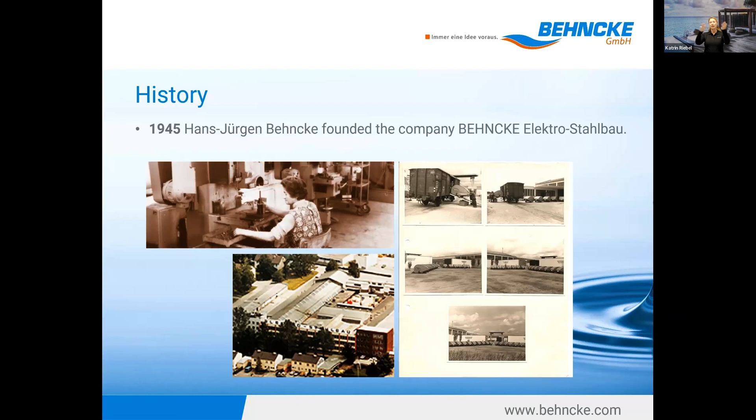So yeah, our history. BEHNCKE has a very long history, since 1945. Imagine, at that time nobody talked about swimming pools. So BEHNCKE at the time worked with steel. Maybe you remember this car parking construction where you went into the car, it went up and the next car came in. For example, this is something they were producing at that time.

But in 1970, Michael started with swimming pool equipment. He already did filters, heat exchangers, and swimming pool equipment. So Michael was the first one. It's over 50 years ago. We have a history of swimming pool equipment. Unfortunately, life sometimes goes different ways, as most of us know. He was very ill. So his daughter had to take over the company when she was very young. Imagine you have a company when you're 23 years old, and deal with it.

Now I would like to show you a little video so you already have an idea of what we are actually doing here in Germany. Hello, I'm Angela Herman, responsible for international sales for BEHNCKE. Just coming from Barcelona, I want to show you what makes BEHNCKE so special for you.

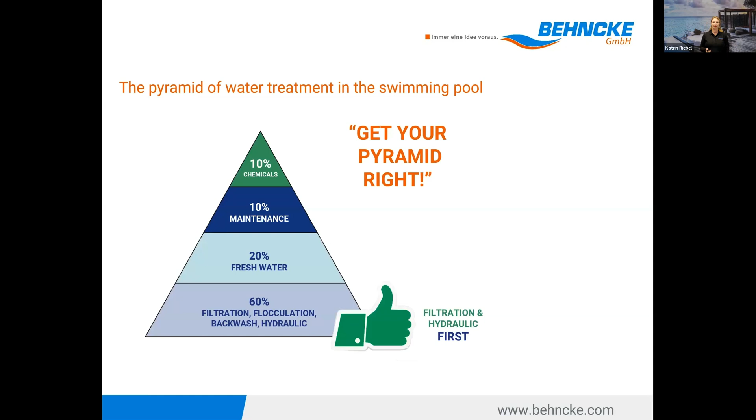Of course, not only the theory, but we also follow regulations - the European regulations for security and water treatment. And on top of that, we follow the German norms from the German Swimming Pool Association.

And here I'm going right into our products. We start with filtration. My colleague has made a super nice video where he explains in detail the complex work of making a filter.

Hello guys, hello everyone. My name is Christian Ebert and I'm responsible for the production sites of the BEHNCKE company. Today I have the honor of being your guide. In a few moments I will show you an insight into the production of the BEHNCKE company. In the course of our tour you will see and perhaps understand what a great effort it takes to produce a pressure vessel of our high quality. But enough of me.

Come on, let's start. Now we're in the mold making area. The life cycle of every pressure vessel begins in this small area. Up to 4 employees are responsible for the maintenance of the molds, but they are also responsible for building new molds with improved properties, to adjust molds according to customer requirements.

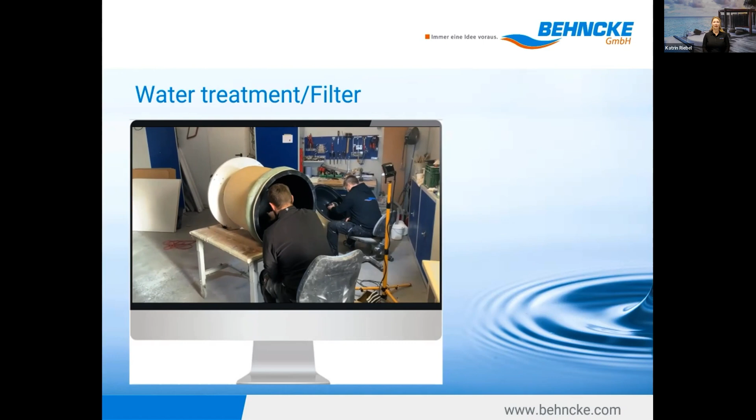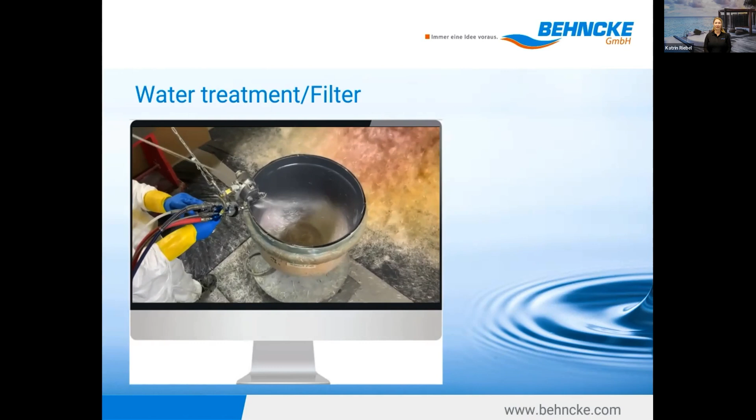The individual filter components are manufactured using various methods, such as fiberglass spraying. However, wrapping or hand lamination is also used, depending on the container type and requirements. Fiber spraying, as shown here, is carried out exclusively by trained employees with many years of experience.

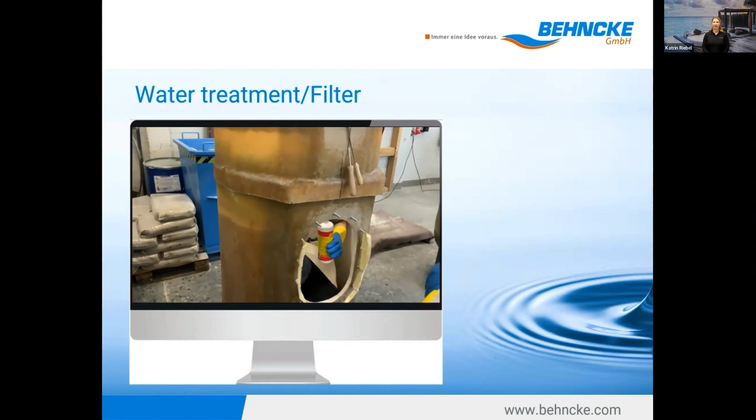Here we see the filters that are made for use in public pools or process water treatment. These exceptional filters are manufactured up to 3 meters in diameter, 4 meters in height, and 10 bar pressure resistance. Many extensions are integrated on customers' request. A split delivery and assembly is also possible and realized by our own employees.

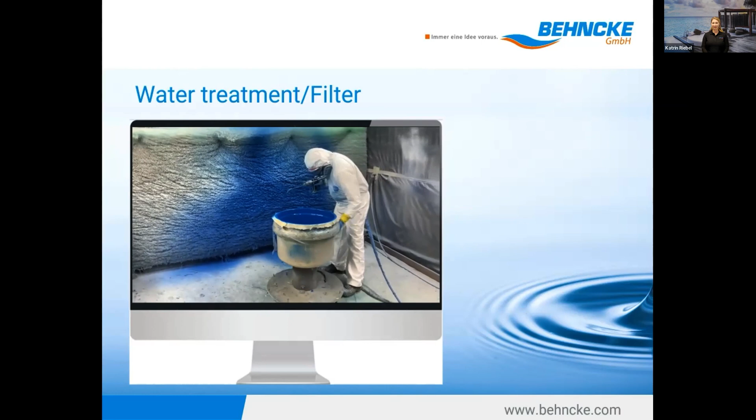Now we are at the start of the manufacturing process of the private filters. First, the color gel coat is sprayed into the molds according to the customer's requirements. Then they come to tempering in a drying room. After drying, they have to be trimmed and pushed to the next process step, the fiber spraying. With the help of modern production methods, there is a possibility to manufacture 100 parts per day.

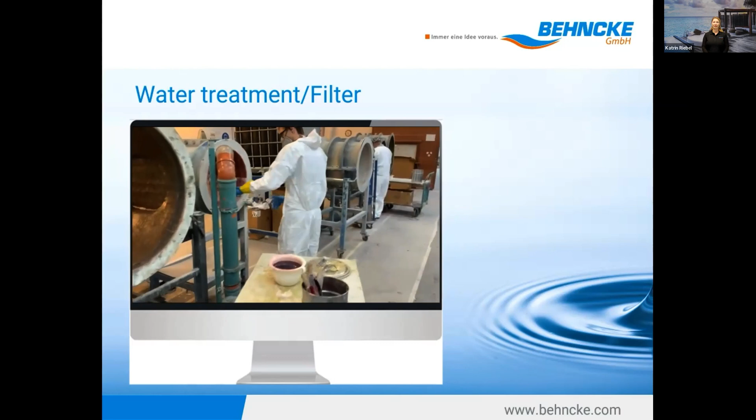Even in private pools, more and more emphasis is being placed on performance. So some filters are equipped with a third component, we call it the jacket. This significantly improves the filter bed and smooths the filtration.

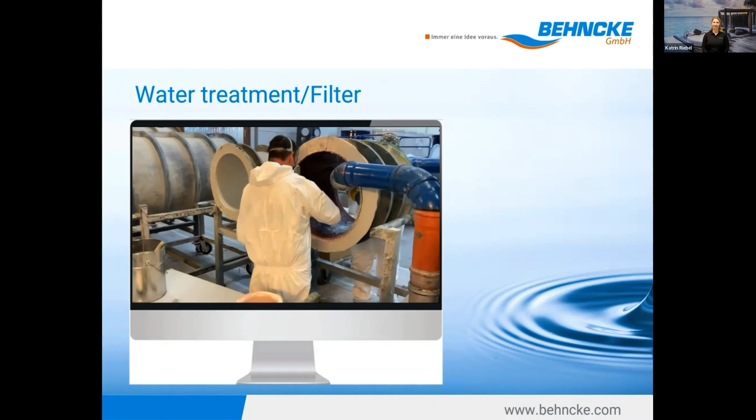Unfortunately, producing the cylinders is also the most difficult of all manual activities. In order to achieve our high quality goals, additional reinforcements are modeled at the critical points. This is one of the reasons for the longevity of our filters.

In order to manufacture as efficiently as possible, the already prefabricated raw parts are taken from the assembly warehouse and pushed to the next step.

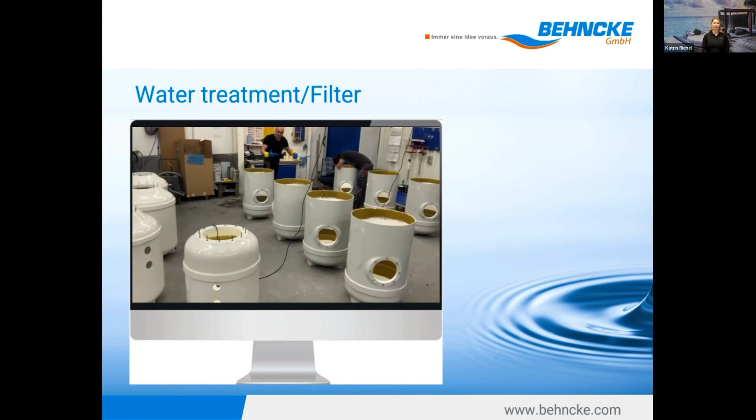Now, the individual components are connected to each other with a strong laminate. That's what we call the wedding. Here, in just a few steps, a single component becomes a container.

After the laminate has been vented, a protective layer is applied, which represents an additional barrier against chemicals or aggressive substances. Next step, the assembly department.

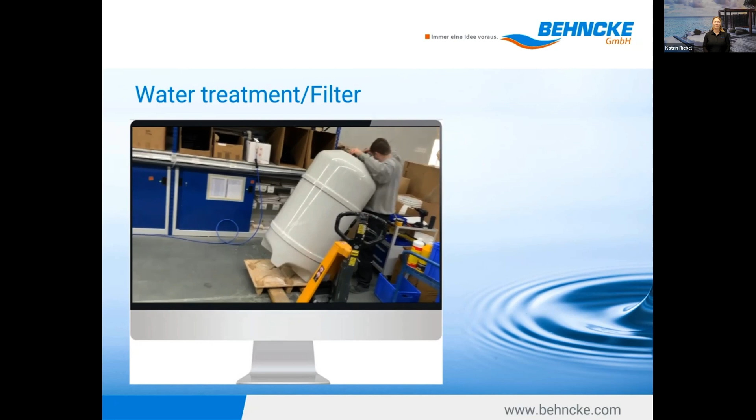Now, container became filters. Depending on the type of filter, filter fingers or filter nozzles, connections and sight glasses are fitted. The rest of the pipeline is also installed here.

Once the filter has been assembled, a valve and a pump are assembled into a filter system, depending on the customer's order.

Before the filters are dispatched, around 20 to 30% of all filters are checked with a pressure test, as you can see here.

As soon as the filter or the filter system is fully assembled and packed by our guys, the shipping department sends it to almost every country in the world.

Before we end, there's a little look at the site here. A production site which in its long history has increasingly developed into the market leader for quality products. A company that values health, sustainability and effectiveness. An organization for which a common, familiar and mutually respectful togetherness is important. We are all that, and we are all BEHNCKE. High quality products made in Germany.

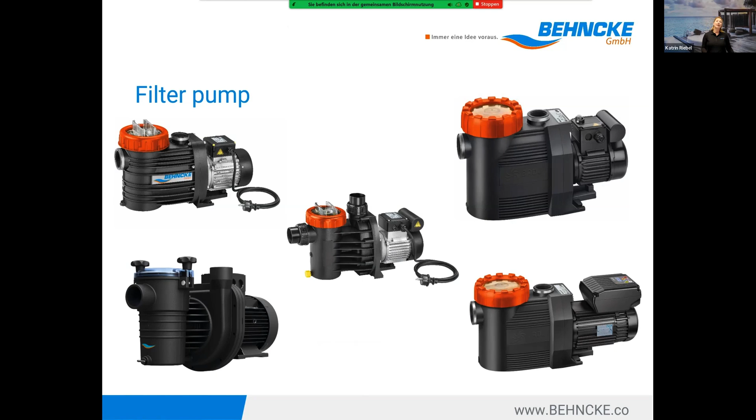Nevertheless, to have a good filter, you need the right filtration pump. And for us, it is very important to have a speed regulated pump. I will show you why. Because we do have different flows, and that's why we want to have different kinds of speed. And at the end, it saves also money. That's very important for the end customer.

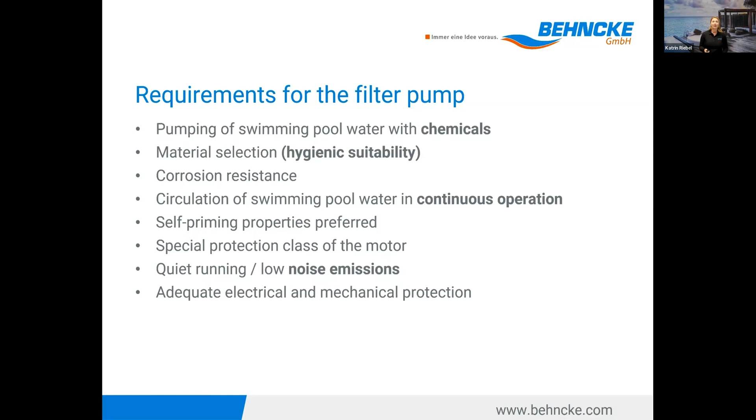But nevertheless, this pump has to be chemical resistant, it needs to be hygienic, it has to work in a continuous process. And nowadays, it should not be very loud, it should be very quiet. Who wants a loud pump? So all these things are very important.

If you have such a speed regulated pump and you already have such a good system, you also want to have to control it. And therefore you want to have a process control.

The other day I was in Portugal and I had no control, and it's not good if you don't have no control. I was in the car and I rented a small Fiat 500 without GPS, and there was a cyber attack on Vodafone that day. I didn't even have internet. So you're lost in Lisboa and you know the name of the customer, that's it. So this is what you have when you have no control.

And it's kind of the same in the pool when you don't know what is the flow. Every time I run out of the camera, I'm getting something. There is something which is inexpensive and it shows you exactly, it's super accurate what is your flow. The good thing about this one, I'm not saying it's the only flow meter, you can take any version, whatever you have, but this is a very good one because you can install it wherever. You don't need a long stretch of pipe before. You can place it before, after, I've seen many videos on YouTube how they install it even later. So this is very practical.

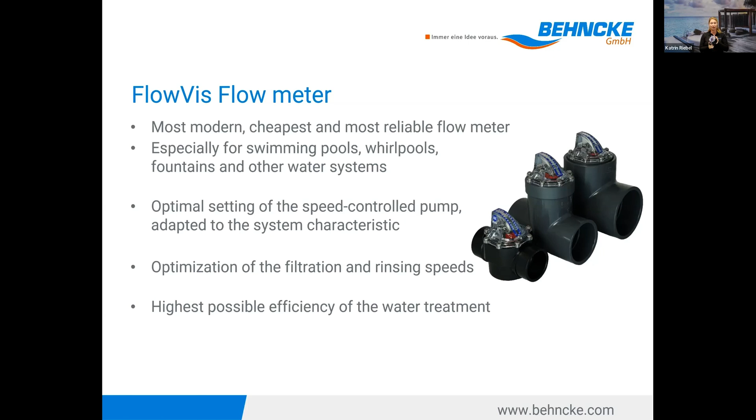It is existing in different sizes. You have even a non-return valve with the first two ones, which you can see. And there's also a digital version.

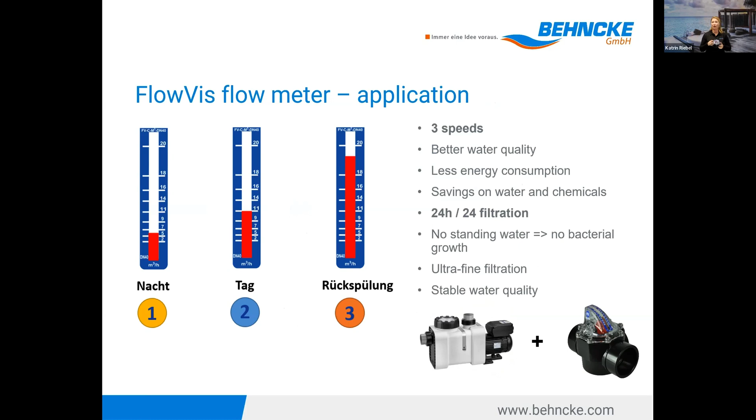All this together, a speed regulated pump and a flow meter, gives you the possibilities to really regulate and control what is going on in your pool. You can do slower speed at night, faster daytime, and you really want a good backwash. Yeah, this is the first part done.

Now I'm coming to our filters, actually. There are many different filter materials. Let's say the cartridge filter, let's start with this one. The other day, somebody asked Marcus, who was also a big boss of the company, why do you think that your filters are better than a cartridge filter? Cartridge is not bad, it is very good, there's a very good fine filtration.

But I can tell you from my experience, I have a very tiny jacuzzi on my terrace, and every time I have to clean that cartridge thing, every layer, you spray, and at the end you think it's not clean, it's still not clean. So it is difficult to clean, and backwash is mostly not possible. The same with membrane, it's a very good fine filtration, but it's also not easy to clean.

Bead filters are more like for fish breeding, you create a biofilm, which we don't want in this case. We used to produce them here with BEHNCKE as well, but it's not what we do at the moment. We are producing AFM filters or media filters, because you can put different media in this filter, but we are working with activated glass material because we have that very long history, as you have seen, more than 50 years. This is the one we are most happy with, simply saying.

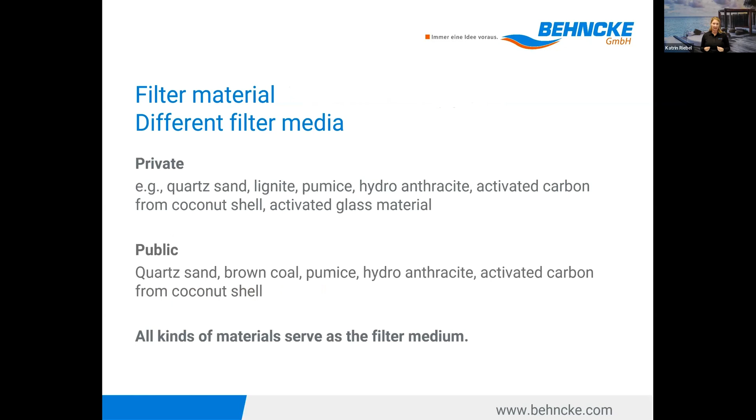But nevertheless, there are different filter materials such as sand, lignite, pumice, and also for public pools, anthracite or activated carbon shells from coconut shells. So there are many possibilities which you can actually fill in your filter, and of course, what we prefer is AFM.

Now we are coming to our filters really into detail. I even have a little surprise for you at the end for that.

And here we are just copying what nature does, basically. You go slowly, as I said, we want a high bed, the water slowly rinsing through different layers, and you get a very good result. It's already a very big part of cleaning your pool. And if you have the right flow, slowly for filtering, much faster for backwash, and the right height, you have some 60% already done.

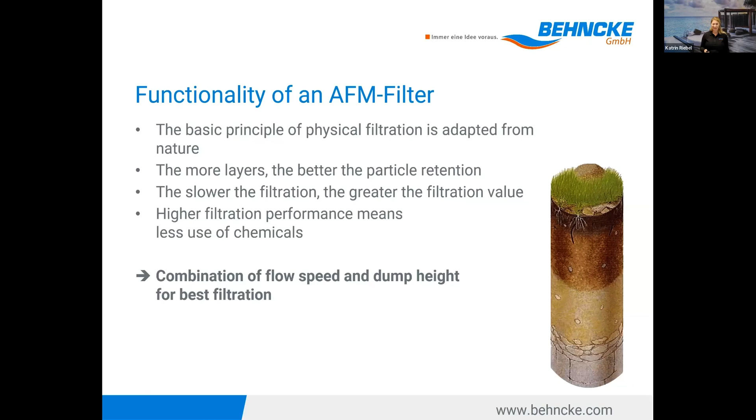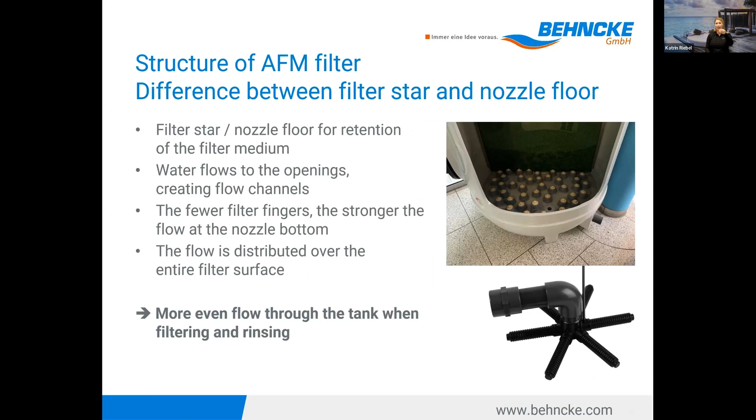And I have customers who ask me how many do you have on the bottom actually. Yeah, this is what our filters look like. We have different dimensions of course, different heights, as I explained, you saw in the video as well. We have a very big opening. You have an acrylic lid, which is transparent, so you can actually see what's going on. We have a sight glass, because you may have a flow meter, you have a nice pump, but you can still see in the filter what's going on in there. Is it really cleaning or is it doing whatever it's doing there? Some customers even want a light because they want to see it more in detail.

We have no plastic feet and we have an inside layer also against chemicals. So this is a BEHNCKE filter. The other day I had a customer who had a filter from 1989, and I thought, okay, I can sell a new filter, and he only wanted the spare part. So I'm not talking about quality anymore.

This is a chart Marcus loves because it shows that for a little money you can get so much more and so much better filtering results. If you see here, if you have a D500 or a D600, it makes a difference, I calculated, of 83 euros. But look at the speed you can go. You can go so much lower in the filtration, 33 meters per hour. You can go so much slower with a little bigger filter for 83 euros more.

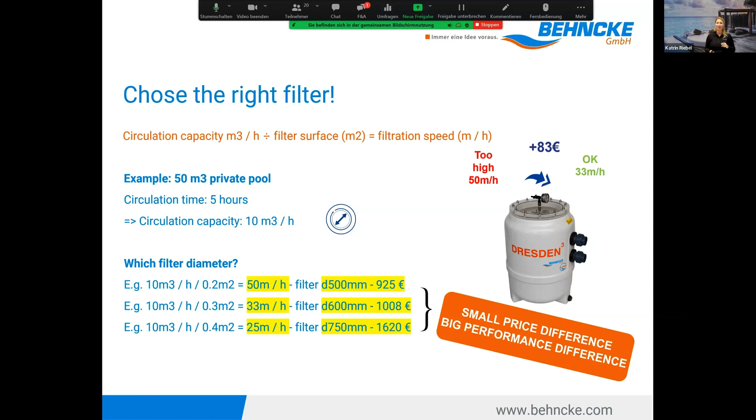And here I want to say something about the filter material we definitely prefer, because we have such good results with it. You get 95% of particles smaller than 1 micron, 95% of those tiny pieces, filtered out with AFM-NG. Compared to sand, where you have 20 microns, or other glass material of 25 microns, with a speed rate of 20 meters per hour. And here you see a video where we explain how it works.

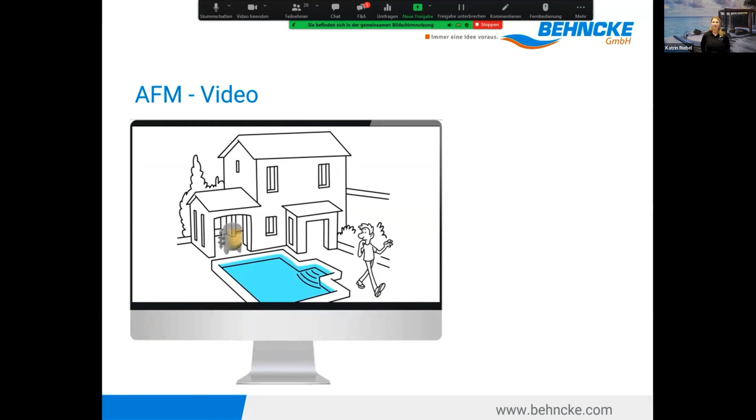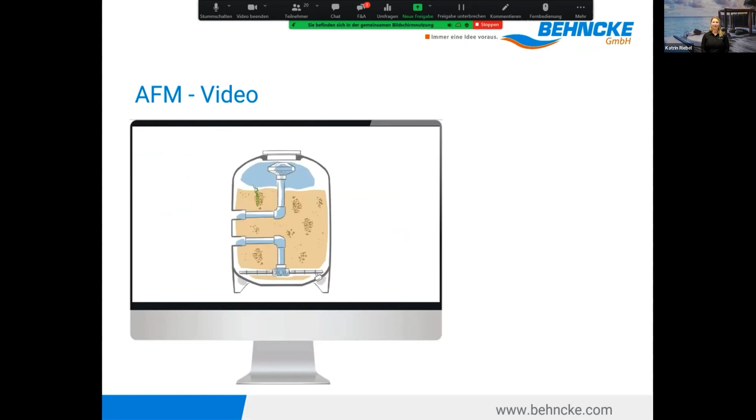Have you ever wondered how bacteria survive in a swimming pool, and why the sand in your sand filter needs to be replaced every 3 to 5 years? The main problem with sand, crushed glass, and other filtration media is biofilm. A slimy, sticky substance formed by bacteria in your filter that protects them from oxidants, inside which bacteria can grow and multiply quickly. After only 6 to 12 months, biofilm starts forming clumps, leading to the formation of channels in the filter bed.

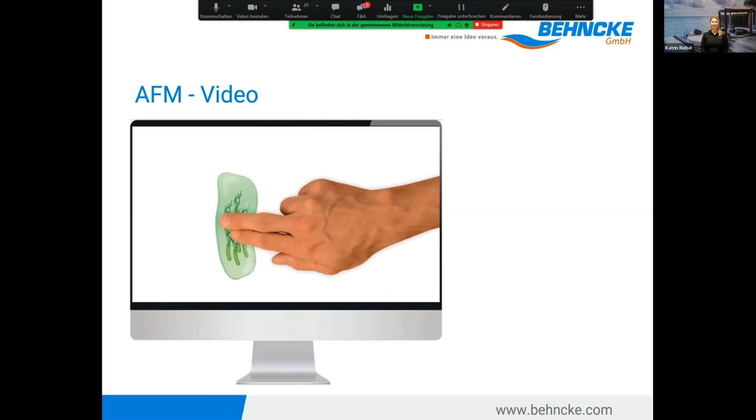With time, filtration performance becomes inconsistent and unreliable by allowing unfiltered water and bacteria to enter the pool while increasing operating costs and water turbidity. Unfortunately, biofilm also creates serious health hazards, as bacteria in the biofilm generate ammonia, which reacts with chlorine to form harmful disinfection byproducts. These byproducts are responsible for the unpleasant chlorine smell, causing eye, skin, and lung irritation. They are not good for you, and especially not for the children.

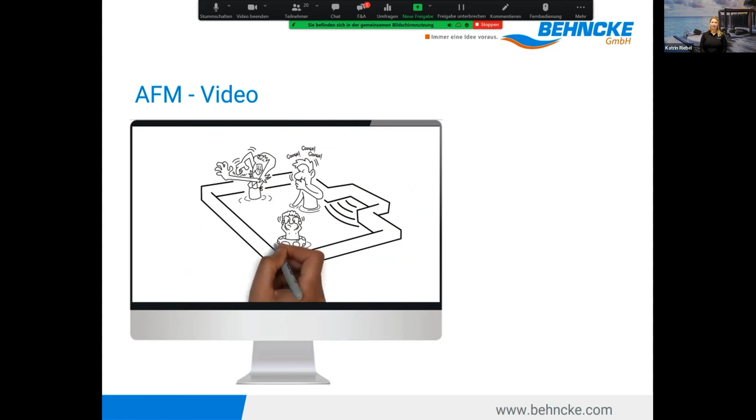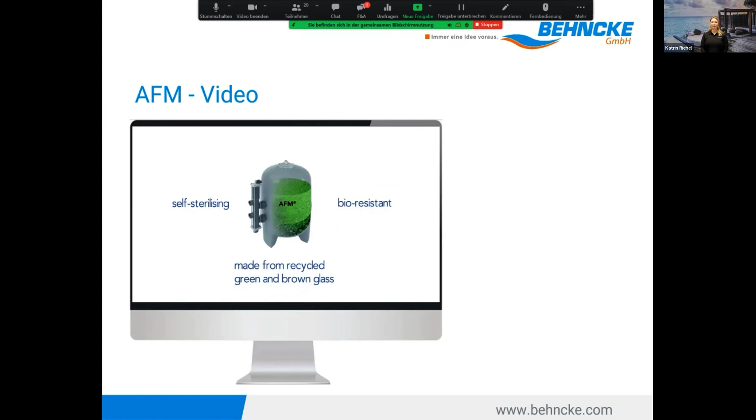But is it possible to get safer, clearer water and healthier air conditions with the same sand filter you've been using for years? It's more than possible with AFM activated filter media by Dryden Aqua. AFM is a self-sterilizing and fully bioresistant filter media made from recycled green and brown glass that replaces sand in any type of sand filter. AFM gets its self-sterilizing properties from free radicals formed on the surface of the grains when water flows through the filter. This renders the formation of biofilm impossible, making AFM the only 100% bioresistant filter media on the market.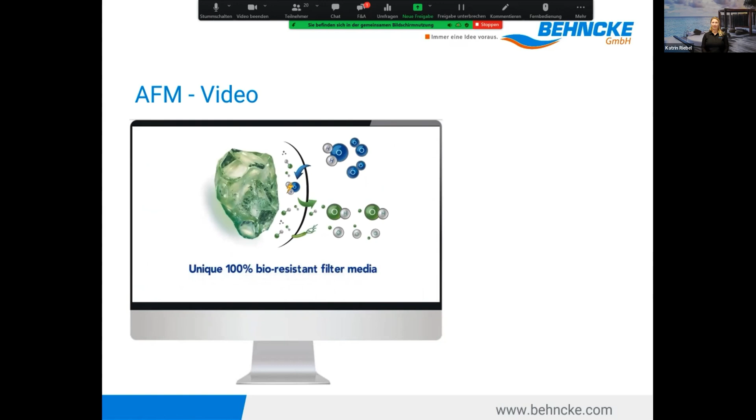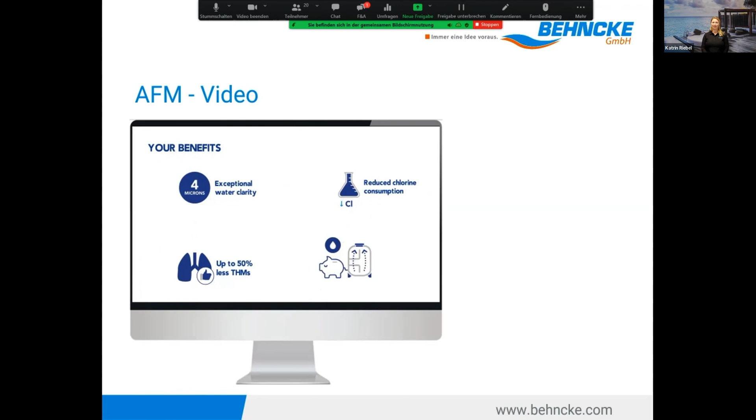What's more, our patented activation process modifies the charge of the glass and strongly increases its surface area, to give AFM unique filtration properties. With a certified 4-micron filtration, AFM surpasses the performance of sand and other glass filter media to provide exceptional water clarity and lower chemical consumption. The activation of the glass also enables AFM to reduce the formation of harmful THMs by up to 50%, while providing substantial backwash water savings for a quick return on investment. Extensively tested and certified, AFM outlasts all other filter media and is the only glass filter media certified for pools and drinking water applications. Enjoy clean and healthy water for years to come with AFM activated filter media.

And believe me, I have been in this company. It is a very complex process how they produce AFM.

Let's come also to a little bit of public filter material use. Here we have activated carbon. It has a huge surface, so you don't need so much of it. But I have to say, only put 10 centimeters on top, because you do want to have a little chlorine going through to not create a biofilm, but with 10 centimeters it works perfectly. It's an ideal media for public use on top, but you need to water it 24 hours before. That's important as well.

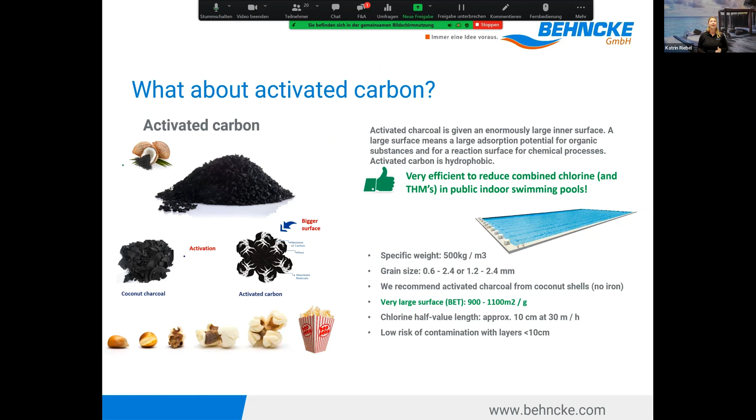And what else is very good for pools is also Anthracite H. Here you need a little bit more of it. What could happen, because it contains a little iron, is that you might have a greenish shimmer. So either of those is fine also for public use.

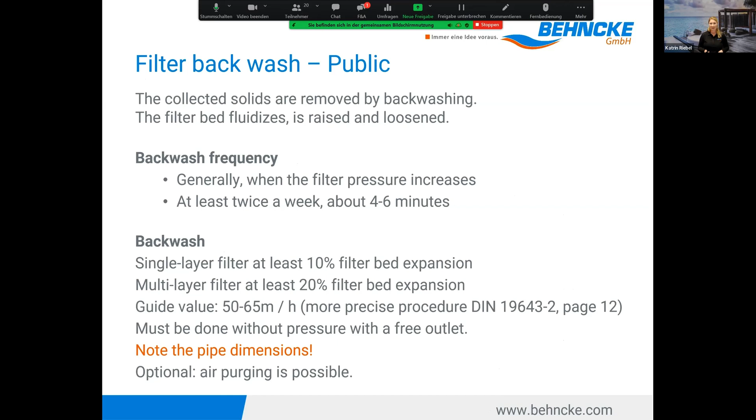Here again, I come with my backwash because it is so important. Here I want to stress it for public: we are saying twice a week, 4 to 6 minutes, and please have the right size of the pipes. For single layer, it should lift up the bed by 10%, or for multi-layer 20%. If you have a sight glass, you can actually see it. And for private, we are saying weekly or twice a month, 2 to 5 minutes, it depends a bit. And also please look at your pipe dimensions.

And I have something about the filters. I'll show you now a little video, and I have it here as well. It's something new we did.

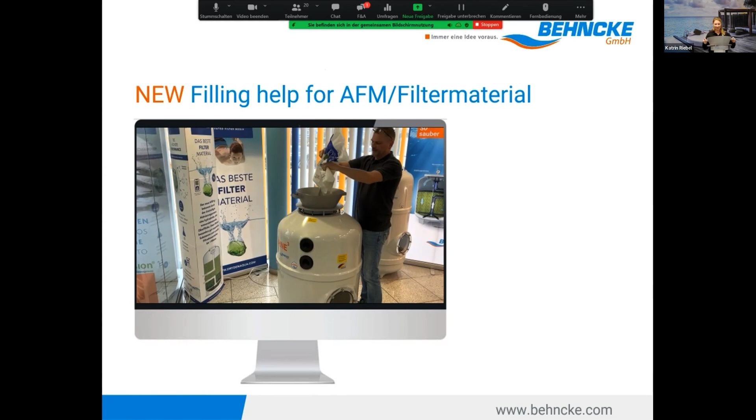So this is actually what it looks like. You even have a peak, so you don't even need to open the bag. It covers the cone, so you don't have a problem that your filter media goes into the cone in your filter. And it also covers the bolts, so you don't need to clean them after you have filled the filter material a couple of times. You know that you always have that dirt. So all these things are thought of.

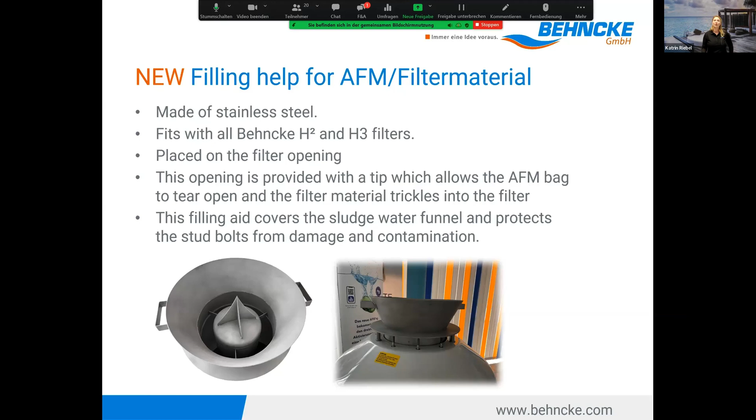So this is something new we have in the program to help to fill filter material. Yeah, what else do we need? Of course, for the filter, we also need a valve, what I have mentioned already a little bit at the beginning. We have a manual valve or automatic. We do prefer here in Germany automatic valve.

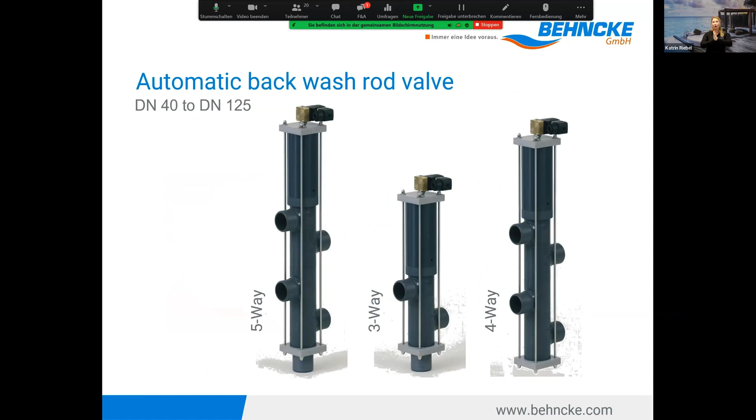And there we have a 5-way, or a 3-way for rinsing, or 4-way, where you can also connect to solar systems. And it's a pretty simple system, generally speaking. This is for filtration or for backwash. Nothing too complicated, but you don't need to do this. No, I mean, it works as well. I'm not saying, but let's say state of the art, probably nowadays automatic. And we have this valve as well for public filters.

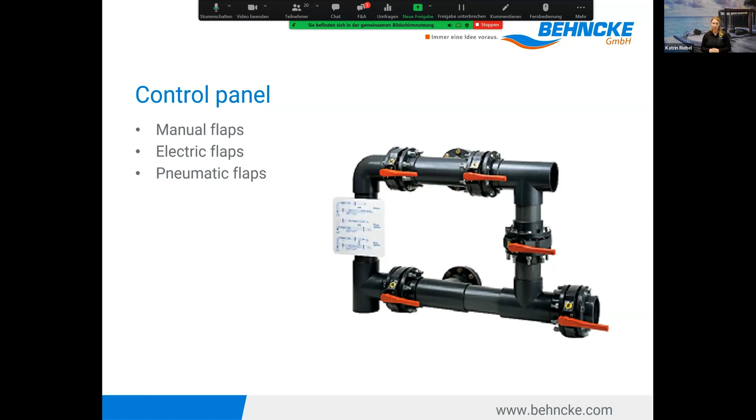So yeah, this is already one part of the 60%, the filtration and the filter, the right pump, flow meter. And now we come to our next thing. And I also wanted to mention, I forgot earlier, that we actually produce about 6,000 filters a year. And this year we are able to produce even more. Yeah, this is one company. The filters is, as I said, in the middle of Germany.

And here where I am at the moment, we have a production of stainless steel parts. Not only, we do other things as well. I will show you later on, but this is a very big part. We do stainless steel components. And here I have a little movie.

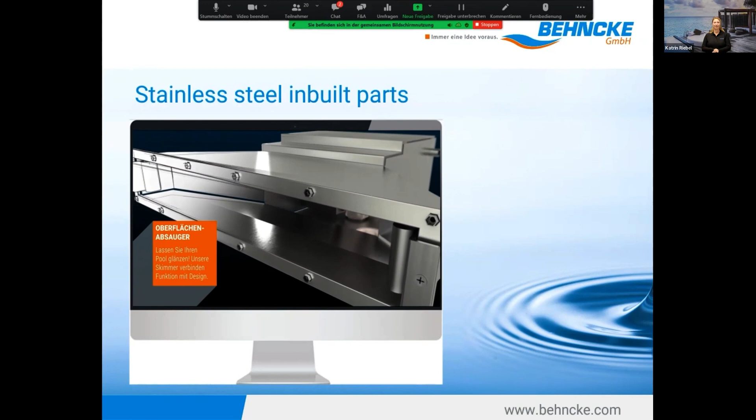Yeah, here you had a little introduction. And first I would like to say, because some customers say, yeah, stainless steel, we're here in Spain. I know, but as we have people who have a lot of pools in Spain and also use stainless steel, it's not a problem. The problem is rather that you have to take care of your water quality. And there we have an index, a Langelier index. And if you follow this index, it costs nothing.

The other day, somebody asked me, how much does it cost? No, you can go online. There's a link. We can also send it later, but you can see here as well. And you just follow what is there. For a very good quality, ideally it is 0. If you have 0, oh my God. But if you go between minus 0.4 to plus 0.4, you are in a very good range and your water is very good. If you go out of those values, either your water gets corrosive or you have a problem of scaling.

So you can try yourself and put in pH and the total dissolved solids, where you have the chlorines in it. You will see if you raise that, it will not even change so much. So it's not, as you're always saying, because of the chlorine. No, there are other values you really have to take care of. And if they are not in balance, you have a problem with water quality.

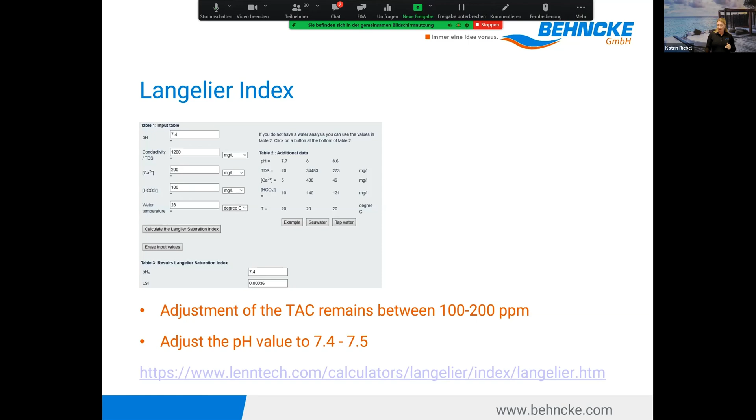And some people say, no, it's all okay. But we go there and test, and say, no, your water is not in this range. So yeah, have a look, see if your carbonate is okay, because this is a big influence. Water temperature is a big influence, but it is what it is, of course. But play around and you will see it's not everything about total dissolved solids, where the chlorine is inside of it. So I want to say that beforehand.

Stainless steel inbuilt parts, I have them actually with me. They really exist. We can match your skimmer to your garden furniture. Not everybody can do that, but yes, we can. So it is possible that you have a stainless steel skimmer plated with those kind of colors. And yeah, I just want to say that because we do have design parts.

And mentioning here right now, BEHNCKE is a family-owned business in the third generation, as you know. We customize a lot. So we are flexible. We want to help you. If you have a customer or a certain number and he says, I need that or this, we make it for you. Of course, it's better if you have a certain number. But one time I asked my colleague, I need a jet for a jacuzzi. He made it for me. It's called Angie. So with BEHNCKE it is possible to have customized parts.

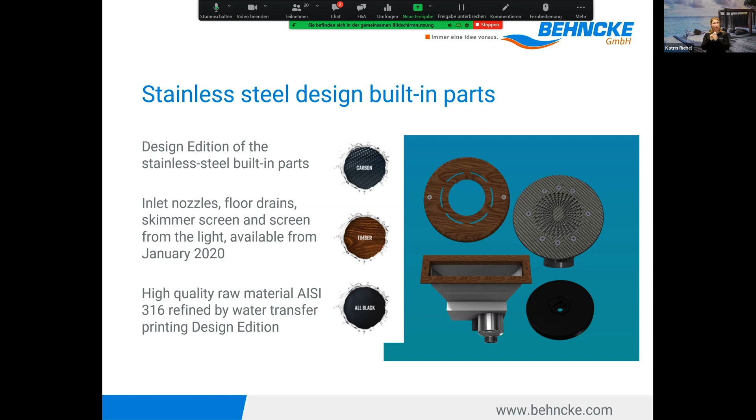I just want to stress it out here right away. You can have your logo. We make it as you want it. And that's why we also have such a wide range of products. Of course, we have standard. I don't want to go around saying we only customize. That's not true. We have our standards, but we do customize. Yeah.

Coming to the parts, inbuilt parts, here you can see the inlet nozzles. We have a lot of versions. You can turn them here, so you have a right angle. We have ones with 4 holes, 1 hole. You can have a flange sealing. We make it for stainless steel pool, for liner pool, mosaic pool, prefabricated pool. That's why we have so many versions, because sometimes customers look into the catalog and say, oh, why do you have so many? Because we adapt to your pool.

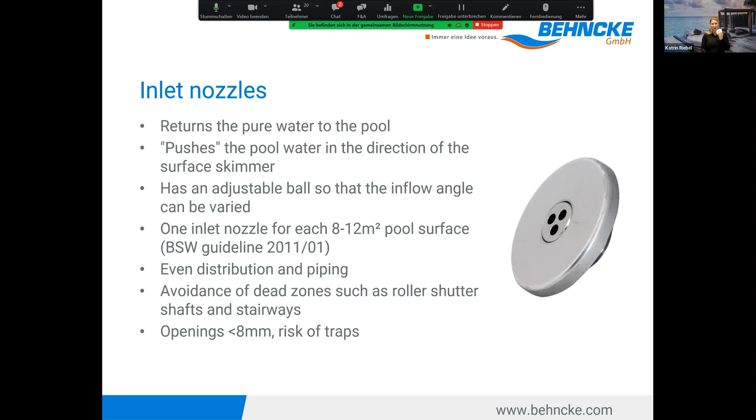And we are saying, please put a nozzle every 8 to 12 square meters. Of course, you have to see that you don't create a dead zone. It depends on the shape of the pool. And the opening is smaller than 8 millimeters, because otherwise you don't want anything to get trapped. So these are very important things for the nozzles. Of course, we have ones for skimmer pools and also for vertical flow if you have an overflow pool.

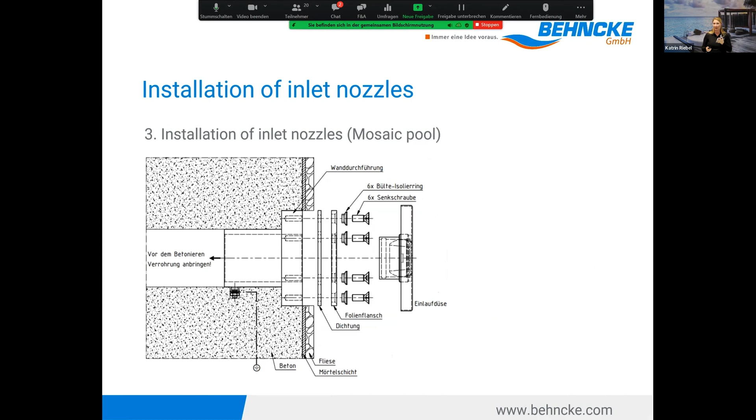A big part of us, of course, are skimmers. And our skimmers have a calming chamber. We have a skimmer weir. You can put a level sensor. And you have to know the wind direction, how you put the skimmer. Put it mostly, if you have a cover, over the cover because there's a lot of dirt. So our skimmers are also calculated. It's not just a coincidence why the skimmer is like this. We calculate our skimmers, and this I wanted to mention already.

Here we are saying we put a skimmer every 30 square meters, but at the end there's also a calculation, also about the calculation of the volume flow. It's not possible that the customer says, oh, the skimmer is not working. Maybe the calculation is not right.

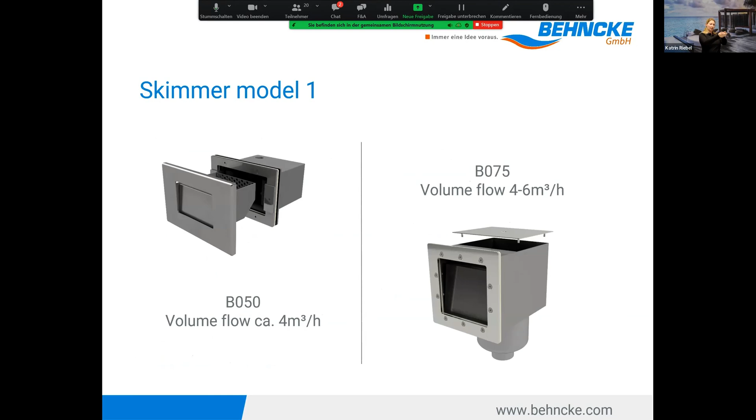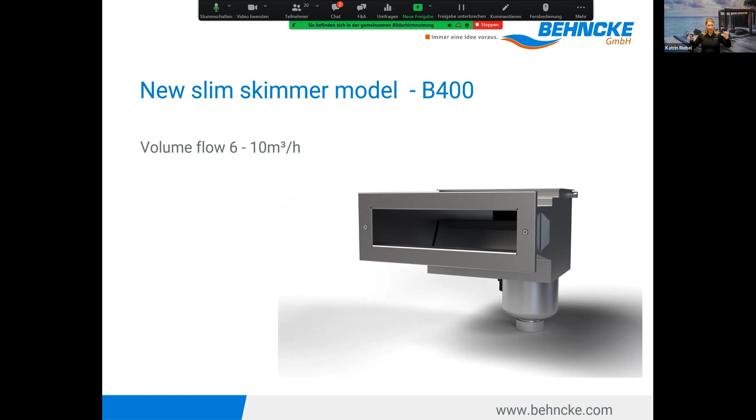We have the B600, and now we have a little surprise because we have a new model, the B400, again a slim skimmer, but for a little bit smaller pool. Here you can see also for inside pools, again, you can pull it from the front or from top. And here is a model Ultimate, because a lot of customers want to have the water as high as possible, have that mirror feeling. So we have different models, also B500 and B600, to have the water level very high in your pool.

Of course, we have a floor drain, and I have it here. It's super beautiful. When I was at the fair, everybody touched this one and was playing with it because it's so nice. And what is nice about it, as you can see, it's also flat, because sometimes, you know, when you go into the pool and you walk and you're like, oh, what is there? So it will not happen with this because it's flat on the floor.

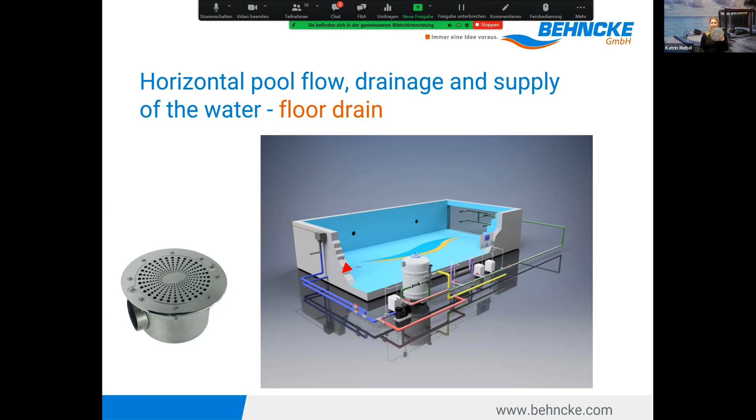We even have like a sticker where it's very easy to install it. We have an opening here, but we can also make it here for you. It looks like this. You can have, of course, your logo if you like. Ideally for a skimmer pool, put 2 floor drains.

And positioning of your inbuilt parts. I don't know how you position your inbuilt parts, your nozzles in your pool, but we really recommend doing it after the Tichelmann model. So you really have an even flow to all your nozzles, and not that the last one is not getting any water and you again create a dead zone in your pool. You probably know what it looks like, but I have a photo where you can see what it actually looks like.

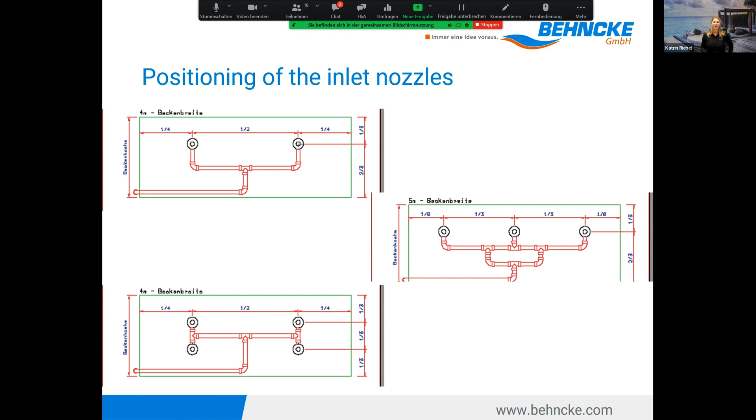So it's the same for the skimmers. You part them evenly, or if you have more skimmers, you part them evenly as well. So we follow this model and you see the piping. And here you see if it's not done, or if you have no nozzle at all in this area, this is what a dead zone looks like.

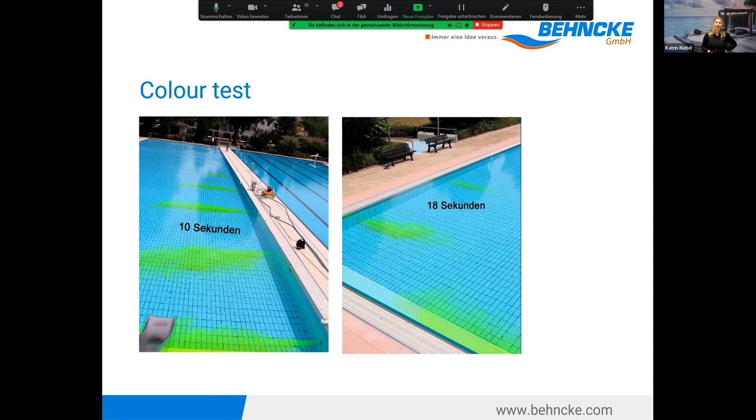And I show you what they do here with public pools to test if you actually have very good hydraulics in your pool. It's called a color test, and you have 15 minutes, and in 15 minutes the whole pool needs to be covered with this color. And here you can guess what kind of pool it is, because you will see in this photo, 10 seconds, and it's almost covered. So what kind of pool is it?

18 seconds. And this is the result in 4 minutes. The whole pool was covered. So you see there is very good hydraulics in the pool and there's no dead zone. And this is actually a pool for children.

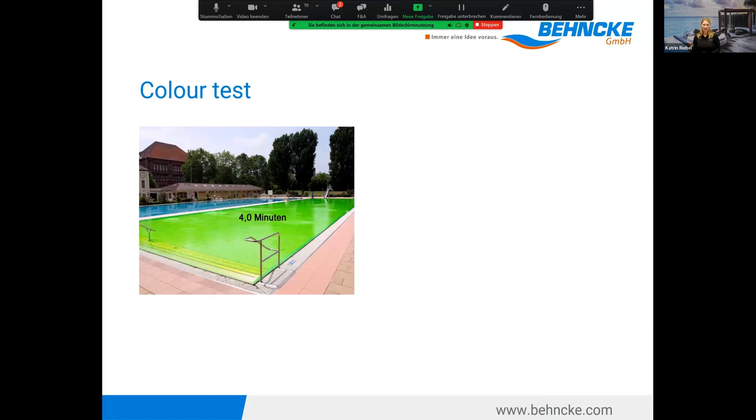Coming already to a conclusion of the 60% of this pyramid. If you have a good filtration and you remember what you need for it, if you have a good interplay of your inbuilt parts and your nozzles, if you have a good layout, good backwash, fresh water adding, 60% of the pool is done. So this is my conclusion for that part. And now I'm going to a new subject.

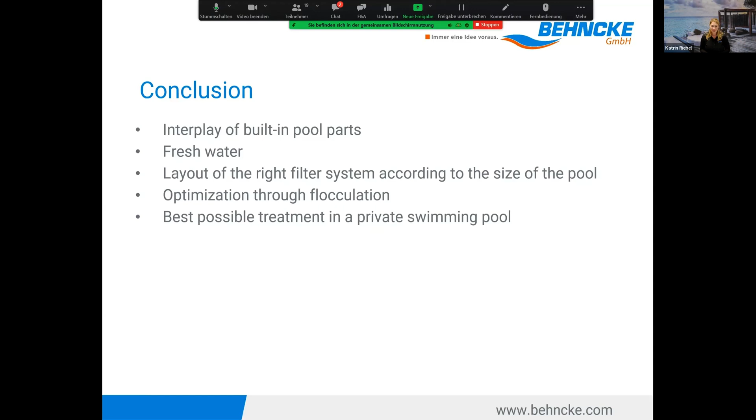I'm talking about light, because we also offer lights. The inside body, I will show you right away. We are working with EVA, a company from the Netherlands, but we do the outside parts, the niche and the cable box. Of course, we have the classical model. We also adapt our faceplate to the classical PAR 56. And this is the range we are offering for pool lighting.

And here you can see an A12, which is very powerful. The A6 has a little bit fewer light points. There we have a Q2. This is one for when you have stairs or a smaller area. Then we have the RX, where you have the lights all around. Or the R6 is for a refit.

I want to show you, I actually have here a light. I hope you can see it and you see how it turns. And maybe you can see that it shimmers in a different color of the light.

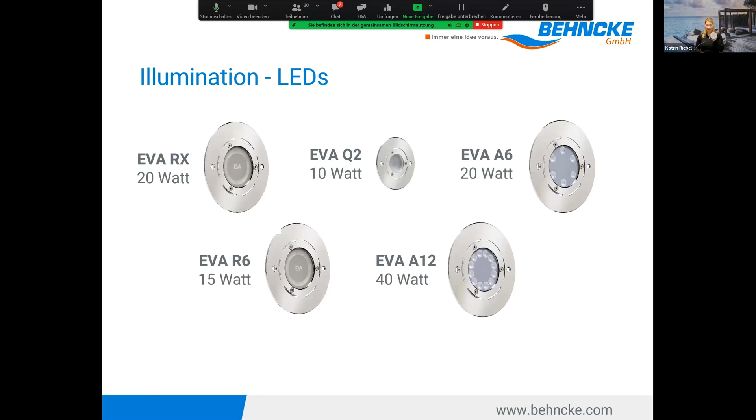And I want to show you also, we have a very good insulation. The cable inside has an extra insulation. So this is something we're very happy with. Believe me, we tried other lights before, but this is the one where we're just very pleased with the result. We give 4 years of warranty.

And with these light points, you can point to the front, but also in the width. So this is possible, and we can customize. If you have a customer who says, no, I only want to point to the front, we can do it with this one. And of course, we have mono and many colors.

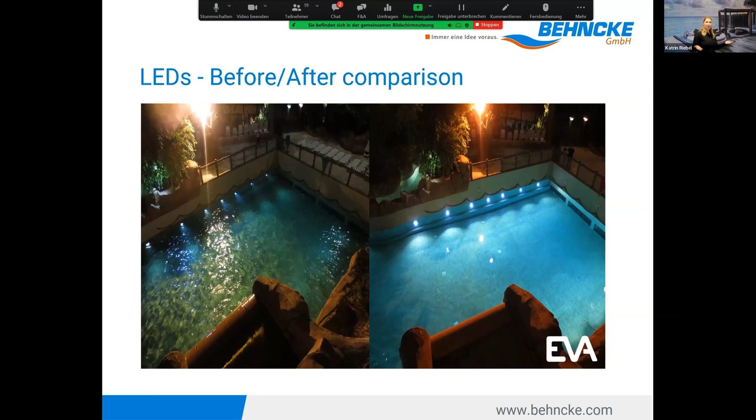And here you can see a result where we did a refit with those lights. My colleague loves this photo because he always says, look at the street light. You have much more light in one photo than in the other. And then you see where the EVA stands. Even with less light from the camera, the pool is totally lit. So this is the result.

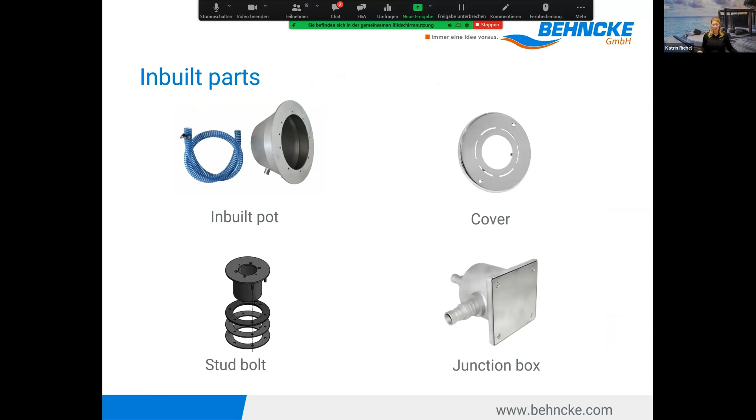And these are the parts we are offering as well. As I said already, face cover, the inbuilt pot, cable box. Please, for every light, use a cable box because you don't want to have a bad result later on, and a stud bolt. And to control, we are offering a manual control, wall control, or even with our BEHNCKE Connect, you can also control the light.

And we have a calculation for everything, not only for the inbuilt parts, but also for the light. You can send us your project and we calculate it for you: what is ideal for your pool, how many lights and so on. We can make it for you.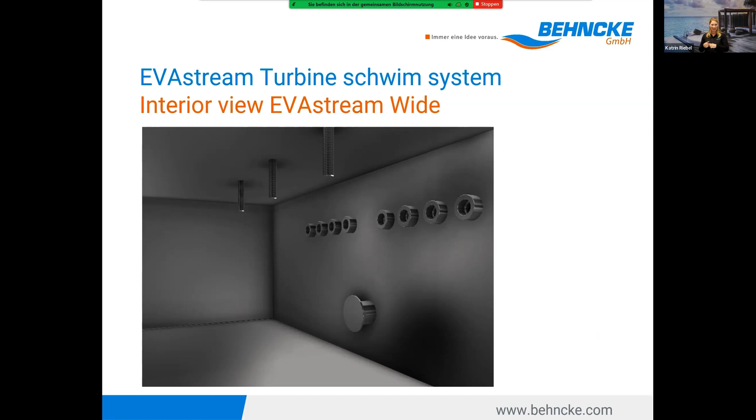We have two versions, the rectangular and the square version. Here you can see what it looks like inside. Of course, we put a nozzle inside to avoid dead zones. Here you have the parameters for the pool: it should be not smaller than 3 by 6. You can see the flow rate of the turbine. You can have 2 as well.

We give 2 years of warranty. So it's a very strong turbine, a very strong counter-current system, and it's an add-on to your pool.

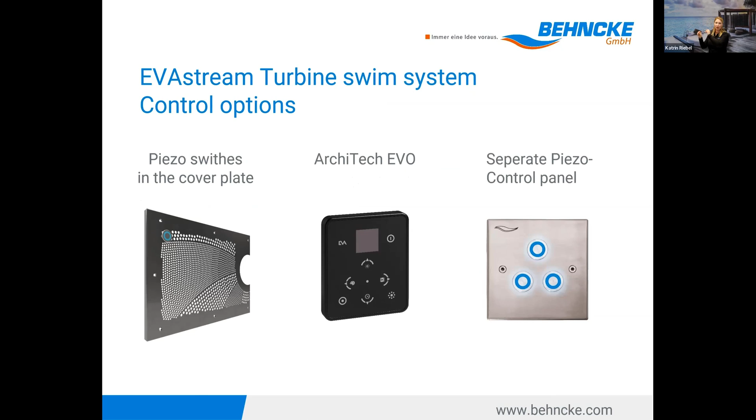You can operate the counter-current system from the faceplate, from the panel, or from a normal device, or in the pool. You can adjust it from 3 points, and it's lighted so you can see if you're getting stronger or less strong. And also from the BEHNCKE Connect, of course.

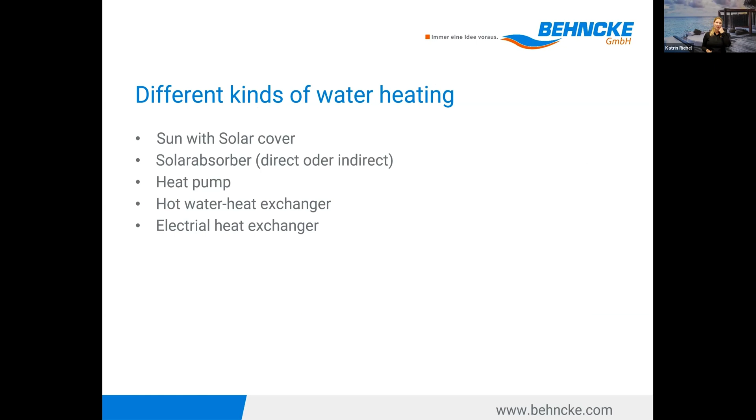Yeah, what else are we doing? We've been producing heat exchangers for a very long time historically. But as I said, with Aquavision we offer the whole system. We have sun plates, heat pumps which we're very happy with, and electric heat exchangers. For the heat exchangers it's important to know the incoming temperature, so we have different models for it.

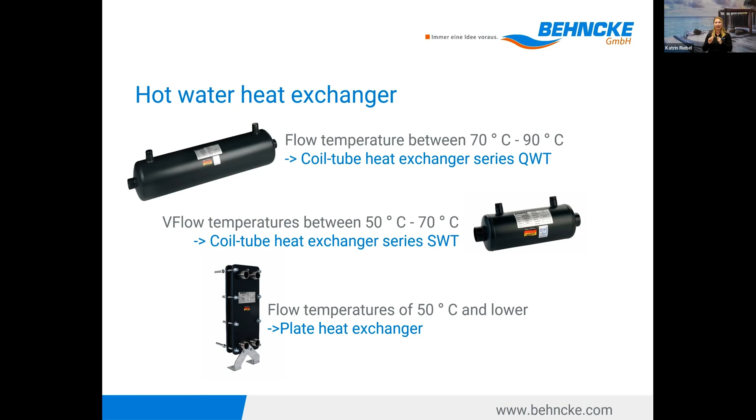My colleague, you don't see him, but he's sitting here and calculates everything. He would always say, Katrin, we have a form where you fill in all the parameters. For example, is your pool freestanding? Does it have a cover? Is it inside? What is the incoming temperature? And so on. You fill in all these parameters and he'll calculate the perfect model for your pool.

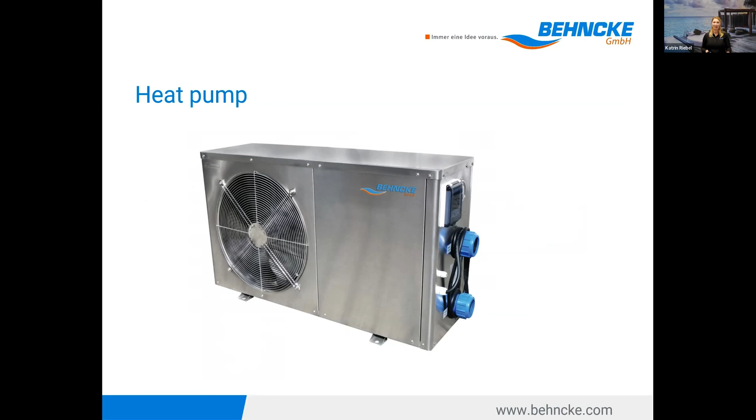Nowadays we're a little more advanced with Control 1.3. We have one also for overflow tanks, and of course BEHNCKE Connect, which is state of the art. Control 1.3 lets you control solar heating, has a color display, backwash capability, and other possibilities. We have it in more languages, and this is what a lot of people use nowadays.

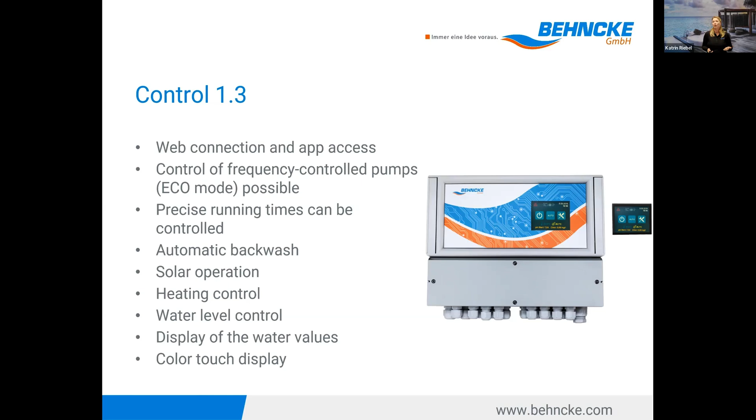This is what I mentioned for the balance tank, when you have an overflow pool, and BEHNCKE Connect. BEHNCKE Connect lets you connect your attractions, including diverse counter-current systems. Sometimes we can connect even other systems - if you give me the information on what you're using, I talk to our technician and he tells me if we can do it or not. BEHNCKE Connect is like the smart home, up-to-date version of a swimming pool control. And it even speaks.

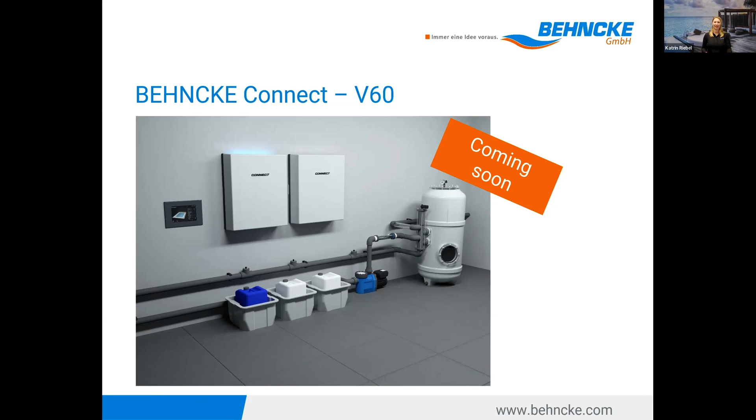What we also offer are packages. Sometimes customers ask, is it possible to have filter, valve and filter material, can you prepare it or the pump always in the same way? Of course it is. So if you want packages, just let us know, we will prepare an offer for you, and we can always do it like this. You can pick it up or we send it. Everything is possible.

And here we are now ready, and you have maybe already received this week the digital catalog. I want to show you the new version of our catalog. It's super interactive, you even have some videos there. It's basically like a toy for adults, but you can also buy something, of course.

As I said, you have an introduction, you can go on the article number and you can go into the shop. But in the shop, we're also thinking of having it in other languages in the future. Maybe we can show something, show how it works. Or we leave it as a surprise.

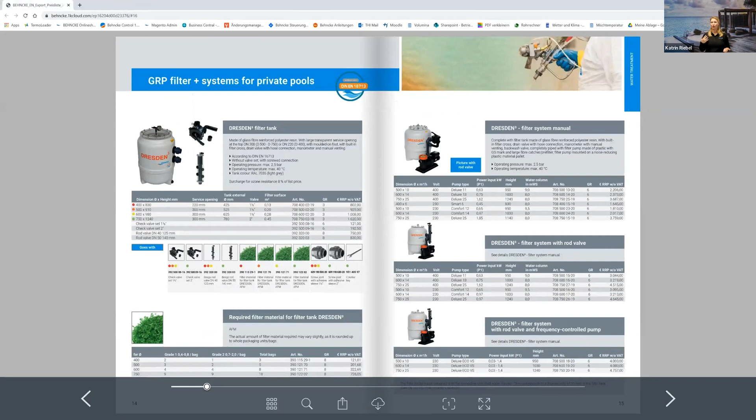You have explanations, here you can go on the article number, you can see a photo, a bigger photo. So here you already have photos because some people are always asking, 'Oh, do you have a photo?' Here you can also download it. So it's a really interactive catalog, where we also easily change something, but for big changes, of course, we will always inform you in advance.

And yeah, so this is the 2022 version.

Now we do everything again. No, I'm joking.

So yeah, but I know what you want, what I want to say. And the next thing is, we have an export team. It's not only me, maybe you know me because I travel around, but of course we have people who help a lot here in the office, and this is Ekaterina and Nicolas, and all these people make the export team.